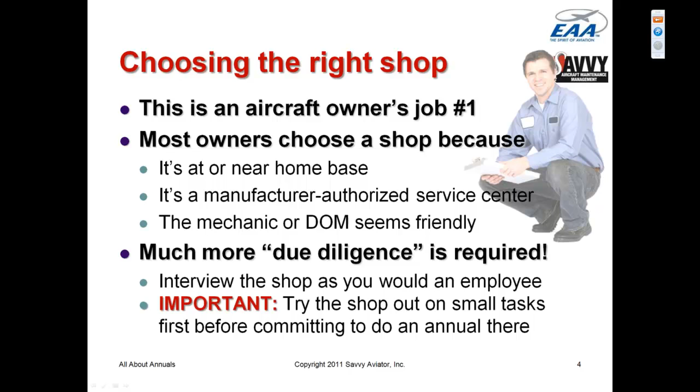To net down what we look for when we're evaluating a shop, I call it the 3 C's. We're looking for competence, good communications, and cooperation.

Competence means that the shop has extensive experience with your particular make and model. Just because a shop is very good with, say, Cirruses, we would not take a Cessna P210 there for an annual. We need a shop that has extensive experience with your particular make and model, or what we like to call high time and type on the part of the mechanics.

Communication is absolutely critical. You cannot manage an annual unless the shop is willing to keep you in the information loop and allow you to make decisions wherever decisions are required.

Many shops are very good at communications, others are very bad. Shops that take the attitude of 'you hired us to do the annual, now go away and let us do our job' are simply not shops that we can deal with, because decision making needs to be done by the owner, not by the mechanic. If the mechanics don't keep the owner in the information loop, then the owner can't do his job of making maintenance decisions.

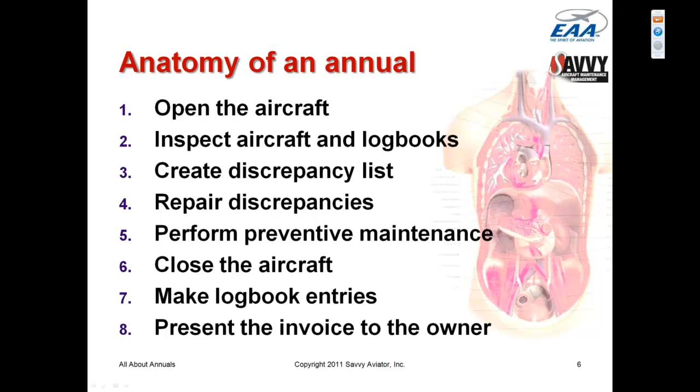There's a very important point in that sequence, what I call a decision point, which occurs after the inspection part of the inspection is completed and the discrepancy list has been prepared, but before any discrepancies are repaired. That's the point where if the aircraft owner is going to affect the outcome, that's where he has to do it.

It's the owner's job to review the discrepancy list and then go back and get any questions answered that he needs answered, and frequently there'll be a lot of questions at this point. Then when he fully understands the situation, go back to the shop and say, here's what I want you to do, here's what I want you not to do. This is the decision point. If the owner isn't heavily involved in the inspection right at this decision point, then he's not going to be able to affect the outcome, and he's basically going to be a bystander, which is not what we want.

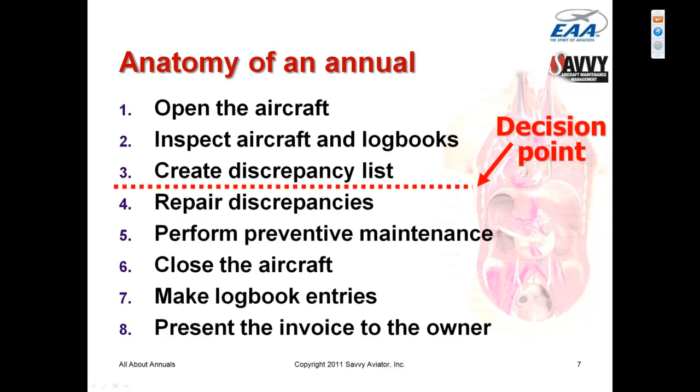So in order to make sure that the owner is involved at the decision point, we divide the annual into 3 phases. The first phase is the inspection phase, which the service center normally does at an agreed-to flat rate, as opposed to doing it on time and materials. Almost every shop will agree to do the inspection part of an annual inspection for an agreed-to flat rate, so there won't be any surprises as to what the inspection part costs. The inspection culminates with the preparation of a work order that contains a detailed discrepancy list and specific repair recommendations with specific cost estimates for each one.

The second phase is the review and approval phase. At this point, the responsibility transitions from the shop to the aircraft owner, and the owner reviews the discrepancy list and cost-to-repair estimates in detail, asks whatever questions he needs to ask, consults whatever outside experts he feels like consulting, and ultimately winds up giving the service center specific direction as to which items he wants repaired and which items he doesn't want repaired.

And then finally, in phase 3, responsibility passes back from the owner to the shop, and the shop performs the repairs as the aircraft owner has directed, and ultimately submits an invoice and prepares logbook entries approving the aircraft for return to service. So this 3-phase protocol is the way we ensure that the aircraft owner is involved at the decision point and gets to make the decisions that he needs to make.

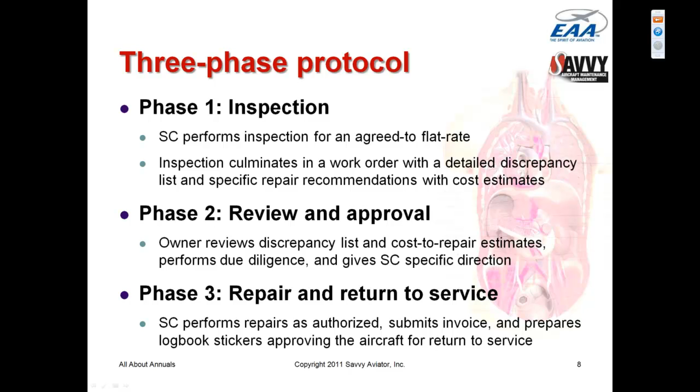Here are some examples of work orders, and various shops have work orders that look different because they use different software. Occasionally we will still see these work orders prepared by hand, but nowadays most shops of any decent size have a good computerized work order management system, and wind up presenting work orders that are nice and easy to read and formatted.

Here's an example of one. The things I've boxed with little red boxes are the indications for each item. First of all, notice that each item is numbered so that we can refer to these items by number easily when we go back to the shop and say what we want to approve and what we want to decline. Second, each of the items is identified as to whether it's an airworthiness item, a recommended item, or a preventive maintenance item. In this case, item 13 is marked customer declined because the customer already said he didn't want to clean the fuel injectors, for good reason.

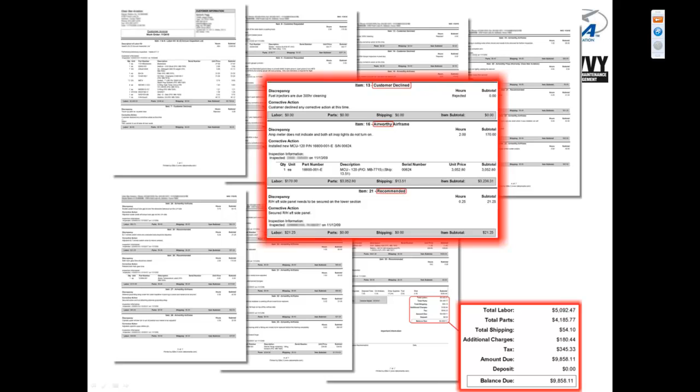Here's another segment of a work order, again showing how the various items are clearly identified, or should be clearly identified, as whether they're airworthiness items that the shop feels must be addressed, or whether they're recommended items that are at the discretion of the owner.

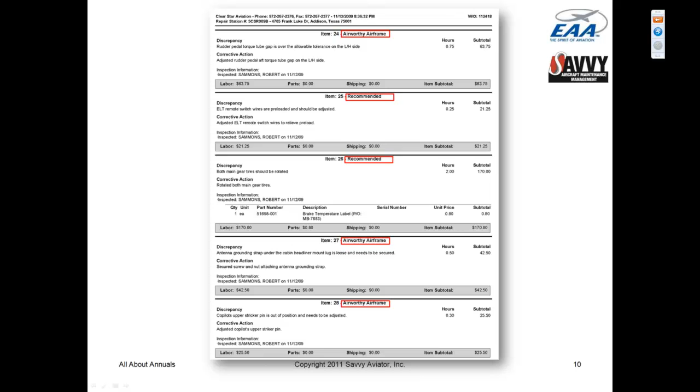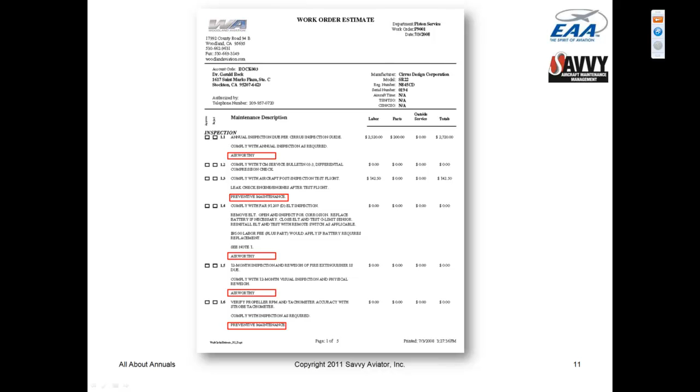Here's another one that uses a different software package, but again, each item is numbered and each item is clearly identified as whether it's an airworthiness item or not.

At the conclusion of the owner's review and due diligence, the owner would then come back to the shop with specific direction as to what items he approves, what repairs he approves to have done, and what items he declines.

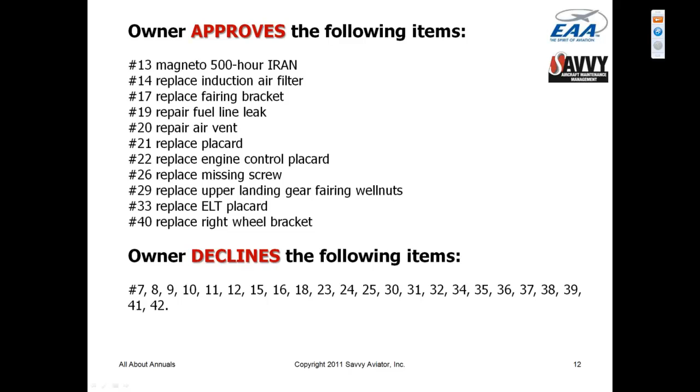Here's another example where the shop presented its discrepancy list as an Excel spreadsheet, and after consulting with the owner, we annotated the spreadsheet to indicate which items are declined and which are approved, and sent the annotated spreadsheet back to the shop.

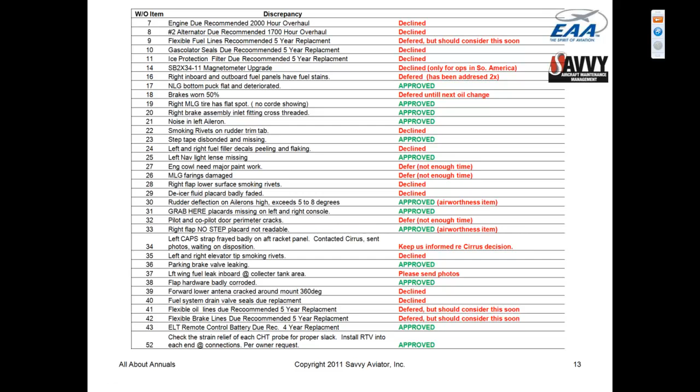Again, here's an example of a list of manufacturer recommended time-directed items that the shop presented us, and again, in consultation with the owner, we went through and crossed off the ones that we didn't want done, and sent the annotated list back to the shop.

So there are various ways of doing this, but basically the idea is the shop provides recommendations, the owner goes over those recommendations and decides which ones to accept and which ones to decline.

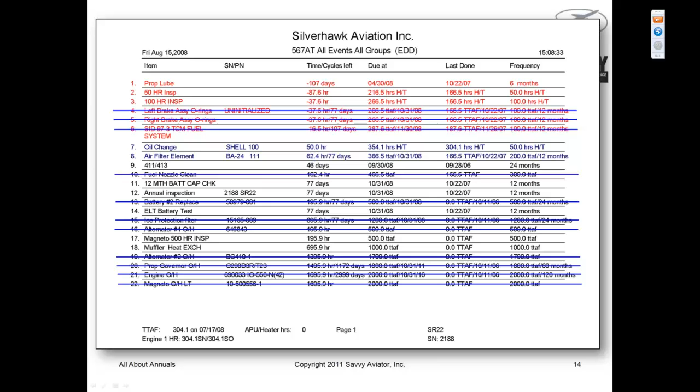One of the things we often run into at shops that is totally unacceptable, where we have to work kind of hard to get them to follow reasonable protocols, is where instead of completing the inspection first and providing a discrepancy list and waiting for the owner to give approvals or disapprovals, the shop will fix things as it goes along. It will inspect a little and fix a little, and so on.

That's very convenient for the shop, but it is a total disaster for the aircraft owner, because by not segregating the inspection from the repair phase, the shop basically prevents there ever from being a decision point where the owner can go in, review the inspection findings, and make decisions as to what he wants done and what he doesn't want done.

And so by doing this inspect-a-little, fix-a-little thing, which is something that we find quite commonly in shops that we haven't had a chance to train, if you will, the owner is precluded from carrying out his part of the responsibility, and the decisions wind up being made by the shop rather than the owner.

And when decisions are made by mechanics rather than owners, those decisions frequently will not be what the owner would want to do or what's in the owner's best interest.

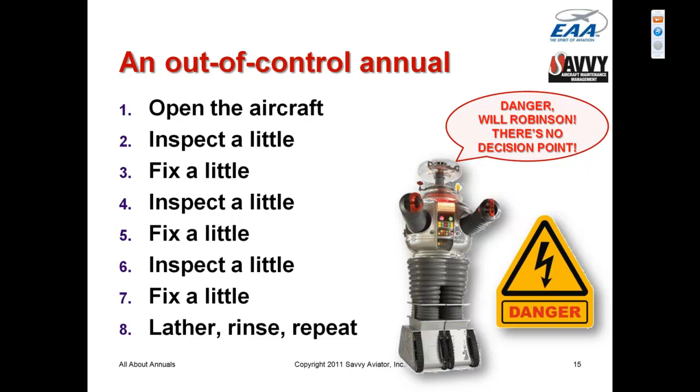Let me give you a couple of examples of situations that we run into. This was one that I happened to find on the Cirrus Owners and Pilots Association forums a couple of years ago, where a Cirrus owner just got the invoice back on the first annual on his airplane since it was out of warranty.

During the first couple of years, the airplane was under warranty, and Cirrus wound up paying for everything. Then, of course, there's that come-to-Jesus moment where the airplane goes out of warranty, and all of a sudden the invoice winds up going to the aircraft owner. The owner posted the invoice to the COPA forum and was decrying the fact that it was a $12,000 annual, and he was very, very upset that it was so expensive.

I started to go through this invoice that he posted, and I found it kind of interesting. Let's just walk through it very quickly.

The first item on the invoice, as always, was a flat rate annual inspection. The shop charged a little less than $2,000 for the annual, which is right on target. At that time, a normally aspirated Cirrus SR22 annual flat rate was 23 hours, and that's exactly what they charged him at a shop rate of $84 an hour, which was quite reasonable for the location where the shop was based.

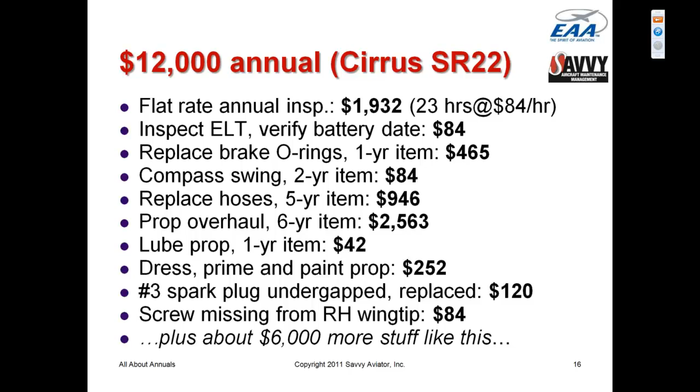Maintenance, and particularly annual inspections, need to be managed actively. You can't just hand the keys to the shop and say, call me when you're done and I'll pay your invoice. You've got to be more involved than that. Otherwise, you're not going to be happy with the outcome.

We'll go through another example very quickly, or as quickly as I can. This one was very interesting. It was probably the furthest over the top annual I've ever seen on a Cirrus aircraft.

This owner has a 2003 SR-22 that he flew a lot, 250 to 300 hours a year. He basically commuted to work in it, and since the warranty had expired, he'd been having the annuals done at a particular Cirrus service center, typically getting invoices in the $5,000 to $6,000 range. And for reasons that I don't totally understand, in 2010 he decided to use a different Cirrus service center, one that he'd never used before and one that he had clearly not done any due diligence on.

This particular service center was one that there had been so many complaints about that literally the week he put his airplane in the shop, Cirrus revoked the service center's Cirrus authorization. But the owner didn't really do any due diligence. He just put this airplane in the shop and then decided to go off on a business trip to India.

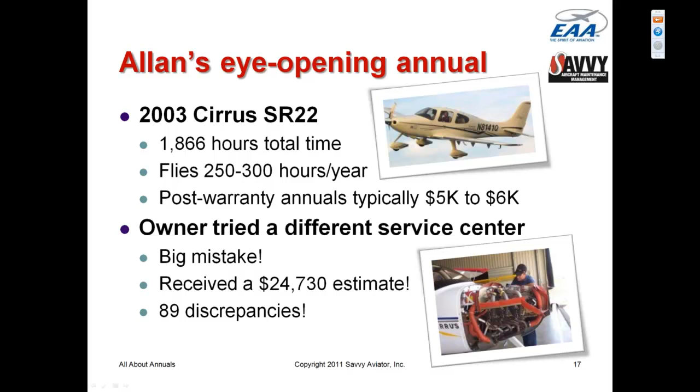A couple of weeks later, he's in Mumbai, and he gets an email from the shop containing the discrepancy list and estimate. It included 89 discrepancies and nearly a $25,000 bottom line. Obviously, the owner was quite aghast when he received this, and he emailed me and said, 'Can you help?' which is when I got involved in it.

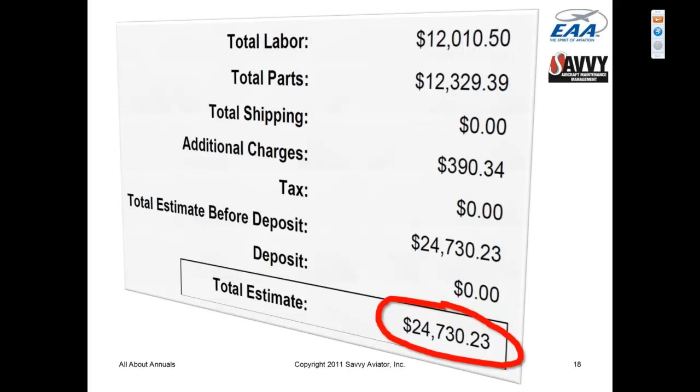But $25,000 for an annual inspection on a Cirrus is way out of the envelope, obviously. So he emailed us the work order. We started going through it, and here's a quick summary of what we found on this work order.

There was an inspection flat rate of $3,600, which is, as you now know, about 150% of what it should have been. $2,400 might have been reasonable, but certainly not $3,600. But he'd already agreed to this, and the inspection part had already been done, so he was stuck with paying the $3,600.

Now we got into all of the discrepancies and repair recommendations on the work order. As you can see, there's a whole slew of 5-year recommended items: flex hose replacement for $1,900, fuel drain valve seals for $180, gascolator seals $150, aileron rudder shock cord $160, a 500-hour recommended alternator number 1 replacement for $1,440, a 1,700-hour alternator 2 overhaul for $790. All of these are items that we would decline.

And also notice that they were all way at the top of the range. For example, on the previous Cirrus SR22 we looked at, the 5-year flex hose replacement was quoted at $900 and some odd dollars, and on this one it was quoted at $1,900. So they must have been proposing to use gold-plated hoses or something.

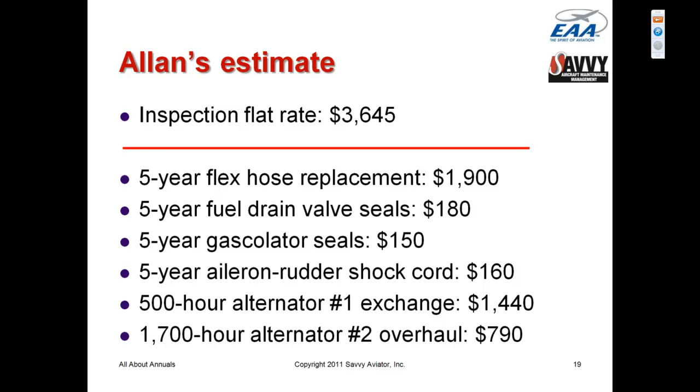The 6-year propeller overhaul for $3,720. A 4-year overhaul of magnetos for $1,700, 2-year main battery replacement $700, 2-year TKS anti-ice filter replacement $320, annual fuel injector nozzle cleaning $200.

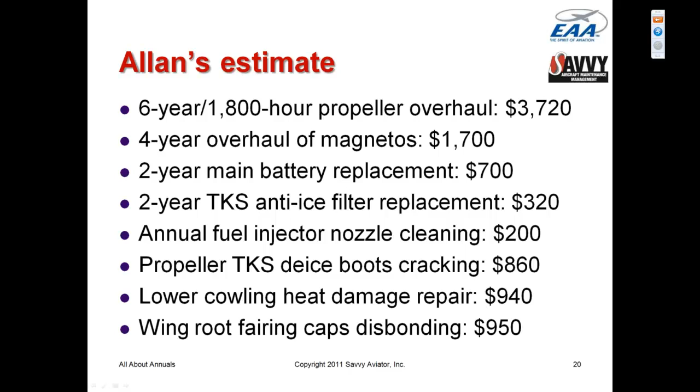The shop indicated that the TKS de-ice boots on the propeller were starting to crack, and they proposed to replace them for $860. That the lower cowling had heat damage, and they proposed to repair it for $940. Wing root fairing caps were disbonding; they proposed to replace those for $950. Muffler flame cones were warped, and they proposed to replace the mufflers with new ones.

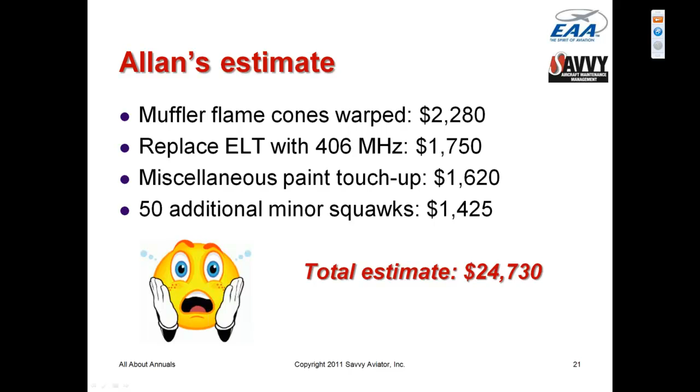At $2,280, to replace the current 121.5 ELT with a 406 megahertz unit for $1,750. Miscellaneous cosmetic and paint touch-up for $1,620, and about 50 additional minor squawks for about $1,425, for a grand total of nearly $25,000. Now notice, all of those items stacked up in one stack, that all of the items that I've circled in red are ones that there's nothing wrong with.

They're not actually discrepancies. They're simply timed recommended items that the manufacturer is recommending doing replacement or overhaul or something at a particular time, but there's nothing wrong. The inspection didn't find that the flex hoses were bad, or the drain valve seals were leaking, or the aileron rudder shock cord was damaged. These are all items that didn't have any inspection finding of an airworthiness issue, but were simply timed manufacturer recommendations.

Only the items that were not circled here, like the de-ice boots cracking and the heat damage on the cowling and so on, were actual inspection findings where there was something found to be awry.

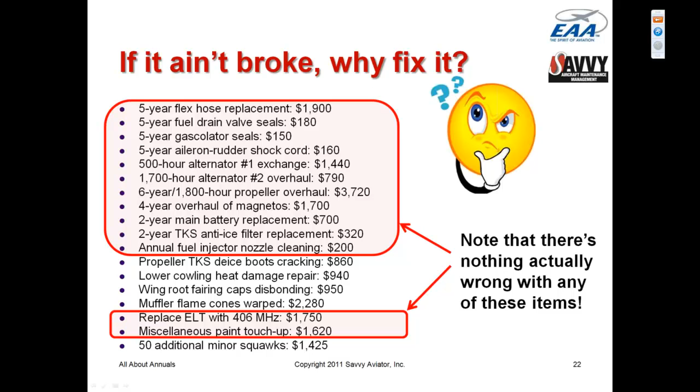So what do we recommend the owner do? We recommend that the owner say no to most of those items that were boxed, where there wasn't actually anything found wrong.

Let me go into a little bit about our thinking on this before we go into the specifics of how we resolve this issue for the owner. We're strong believers in the philosophy called reliability-centered maintenance, which I've done webinars on, which is the philosophy that the air transport industry, the airlines, have used since the 70s, that the military has used since the 80s, and frankly nowadays the only part of aviation that doesn't use this approach is owner-flown GA, low-end GA, like where we are.

One of the goals of my writing, my management company, the classes I teach, and the webinars I give is to try to drag general aviation maintenance kicking and screaming into the 21st century, where we use the same fundamental maintenance approaches that the big boys have used for decades. But one of the fundamental philosophies of reliability-centered maintenance is that maintenance is not inherently a good thing.

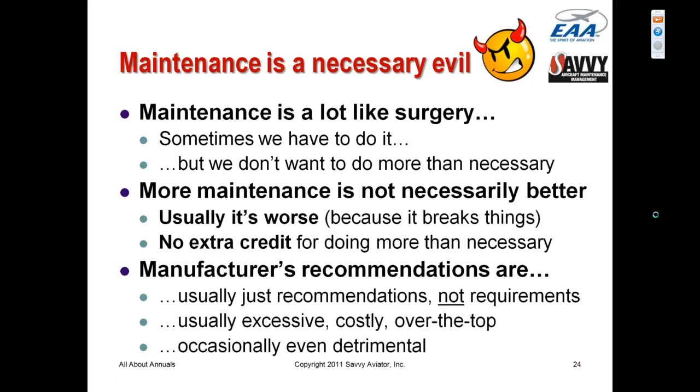It's important to understand that mechanics are going to maintain the airplane strictly by the book, strictly by the manufacturer's recommendations, unless you instruct them not to. The reason is that if a mechanic does not maintain the aircraft in accordance with manufacturer recommendations, makes a decision not to do something by the book, and then something bad happens, he's going to be in a very difficult position when you turn around and sue him. Every mechanic is terrified of being sued these days.

There's been a total explosion in litigation against mechanics and shops since 1994, which is when Congress passed the General Aviation Revitalization Act of 1994. So every mechanic these days will do everything exactly the way the manufacturer recommends, unless the owner instructs him not to, and instructs him not to in writing.

If you tell the mechanic, no, I don't want you to do this list of items, then your instructions to him are his get-out-of-jail-free card if anything bad happens. But if you don't instruct him to decline an item, he's always going to do everything the manufacturer recommends, because to not do that will open him up to liability exposure.

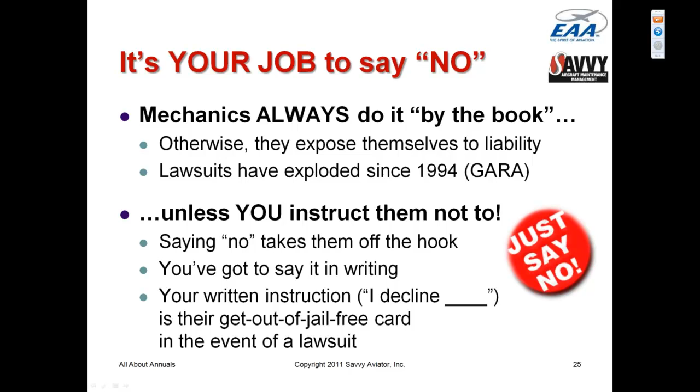That's why it's really important for owners to be actively involved in the decision-making process. If an owner is not involved, the mechanics will typically make decisions to minimize their liability, and minimizing the mechanic's liability is not generally coincident with the owner's best interests. Of course, the trick is knowing when to say no and what to say no to.

Let's talk about that a little bit. High on the list of things to say no to are time-scheduled recommendations that can be performed on condition instead of on a time basis. In other words, instead of doing something every 2 years or 5 years or so many hundred hours, do it when an inspection indicates that the part is deteriorating and needs to be replaced.

The latter is called on-condition, the former is called on-time. Condition-based maintenance is always far more cost-efficient than time-directed maintenance, because condition-based maintenance calls for performing maintenance when it's demonstrably necessary, whereas time-based maintenance calls for doing maintenance based on somebody's guess as to when it might be necessary, and those guesses are always hugely pessimistic because they have to work for the worst-case airplane in the fleet. So they're very likely wildly excessive for the average airplane in the fleet.

Consider ignoring manufacturers' time-based recommendations and replacing or repairing only when inspection shows that replacing or repairing is necessary. Engine and propeller TBOs are excellent candidates for this approach.

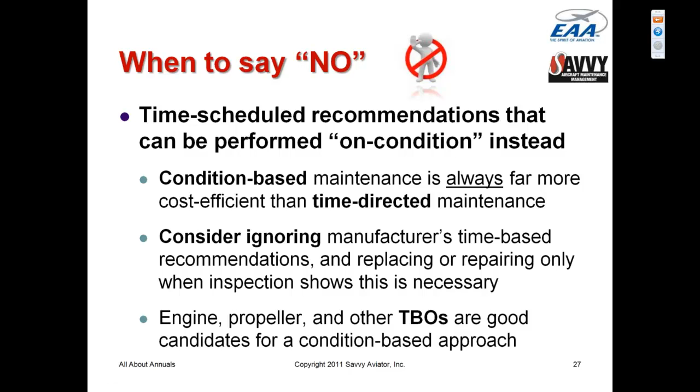Another thing that's a good candidate to say no to is preventive maintenance intended to prevent acceptable failures. What's an acceptable failure? It's a failure that, if it happens, is not going to cause you to fall out of the sky and is not going to cause you to get stuck somewhere that you don't want to be.

A perfect example is the periodic replacement of the TKS anti-ice filter on the Cirrus. That's a $300 or $400 maintenance item that they recommend doing every 2 years. That's, in my view, totally insane. We have never taken out a TKS filter that wasn't absolutely spotless. Why? Because the only thing that ever passes through that filter is pure TKS fluid.

Basically what I say to the Cirrus owners I consult with is, unless you have some reason to believe somebody accidentally dumped a Diet Coke in your TKS tank, there's no reason in the world to ever replace that filter unless the TKS system is starting to act up, in which case it might be worth looking at the filter. But to do this $500 maintenance item every 2 years, that's a $250 a year maintenance item that isn't going to accomplish anything whatsoever. It's just a classical case of the kind of thing we say no to.

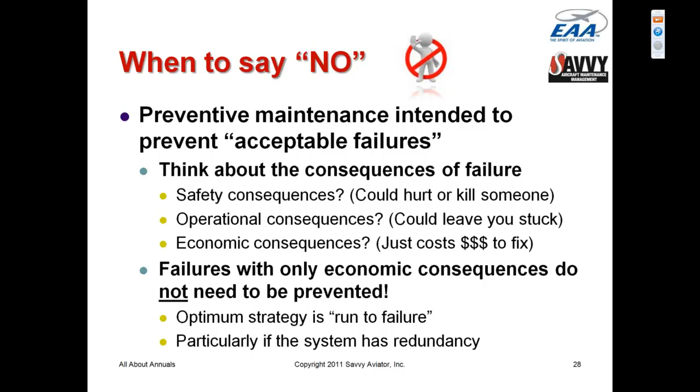Finally, let's not overkill problems. We don't want to replace something if we can overhaul it. We don't want to overhaul it if we can repair it. And we need to be very careful about these words, because words like repair, or IRAN, which is an acronym for inspect and repair as necessary, overhaul, and rebuild, all have very specific regulatory meanings. We want to always use the right word.

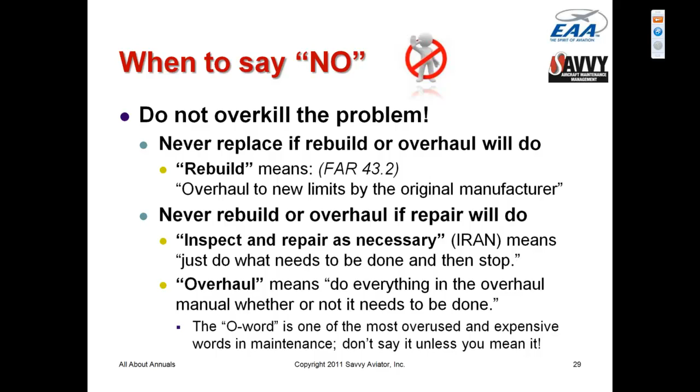There's pretty much a hierarchy of words here. The one at the bottom is the least expensive, and the one at the top is the most expensive. Anytime we have an unairworthy component, we want to decide which of those 4 things to ask for, and typically you want to ask for the lowest cost one that will get the job done.

When we have a 500-hour magneto inspection, we never ask for the mag to be overhauled or rebuilt at 500 hours. We always ask for an IRAN—inspect and repair as necessary. That gives the magneto technician the maximum amount of flexibility to simply replace those parts that he feels need replacing, and to use his own judgment. If we tell him to overhaul the mag, we basically take away his ability to use any discretion. He has to open the overhaul manual and replace everything that manual calls to be replaced, irrespective of whether the part needs to be replaced or not from a functional standpoint.

So many owners and many mechanics are spring-loaded to the overhaul position. The O word is one of the most expensive words in aviation maintenance and should be used very judiciously. We always ask for a repair or an IRAN unless it's clear that an overhaul is needed. Rebuilt is more expensive—rebuilt means overhaul to new limits by the original manufacturer. So, for example, anyone can overhaul your Continental engine, but only Continental can rebuild your Continental engine.

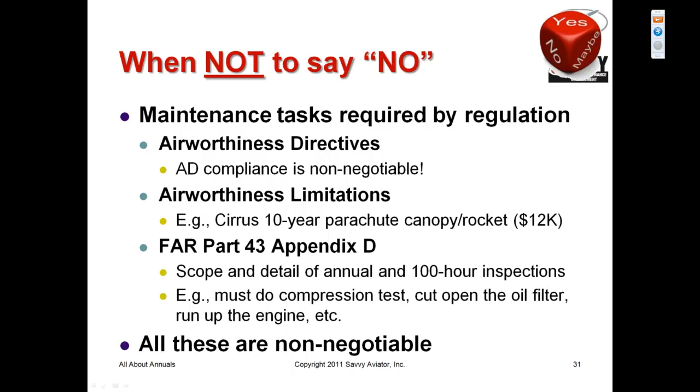And then there are items, discrepancies, that the inspecting IA considers to be an airworthiness item and marks as an airworthiness item on the discrepancy list, as we saw before. An airworthiness item is one that the inspecting IA judges to be not in conformance with the aircraft type design or not in condition for safe operation.

By identifying that discrepancy as an airworthiness item, the IA is basically telling you, I'm not going to be able to sign off the annual unless we fix this. In general, we say yes to repairing airworthiness items because if we say no, we're going to get into an argument with the IA.

On the other hand, some IAs are ultra cautious and call almost everything an airworthiness item. So if an IA calls something an airworthiness item and you disagree, go get a second opinion. And if the second opinion giver tells you that he doesn't think that really is an airworthiness item, then push back. And in the worst case condition, if you are deadlocked with the IA, and we'll talk about this a little bit later, you can...

Break the deadlock by directing the IA to have an annual signed off with discrepancies. We'll talk about that on a subsequent slide.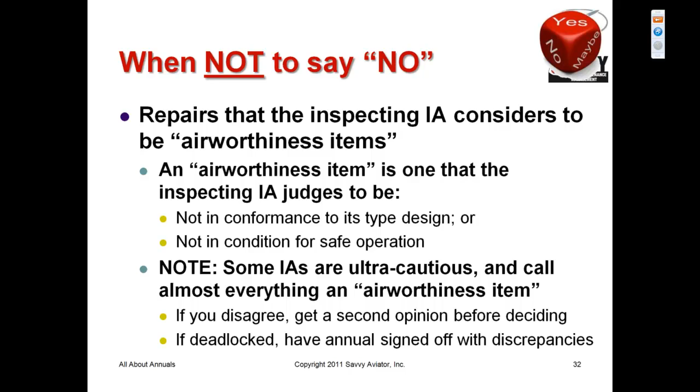At any rate, getting back to our friend Allan with the $25,000 annual estimate, we wound up going through it and declining a bunch of stuff and coming up with a final total of $8,000. Still a lot of money for a Cirrus annual, and there were some things we couldn't do anything about because the owner picked a very difficult shop to work with. But we did reduce the invoice total by about $17,000.

Just quickly, the 5-year flex hose replacement, we declined and recommended that the owner, because the airplane was very active and was hangared, leave the hoses in place to 7 to 10 years, then replace them with Teflon hoses that don't have a 5-year hose replacement recommendation and would probably last for as long as the owner is going to own the airplane. The 5-year fuel drain valve seals, replacing those are silly.

You replace those if the fuel drain is dripping. If the fuel drain isn't dripping, you leave it alone. The same thing with the gascolator seals. If they aren't dripping, leave it alone. Aileron rudder shock cord, if they look okay on inspection, leave them alone. When they don't look okay on inspection, that's when you change them.

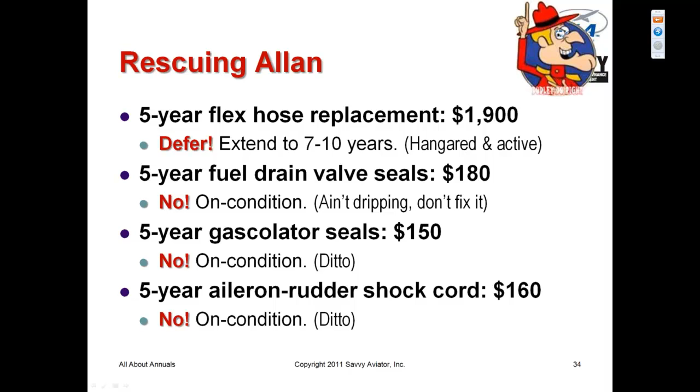500-hour alternator number 1 exchange, no. This is a dual electrical system, dual alternator airplane. It's got 2 batteries, 2 alternators, dual buses, specifically so that the failure of an alternator is not a safety-of-flight item. You fail one alternator, you've got another one. So in a case like that, alternator failure is an acceptable failure, so we run the alternators to failure. We said no, we're not going to change them on time. We're going to run them to failure.

The propeller overhaul we've already discussed. There's no need to overhaul that propeller at 6 years. And even when the prop gets to an age where it would be prudent to take it apart, we will recommend an IRAN rather than an overhaul, which will cost about one-third as much as an overhaul.

4-year overhaul of magnetos is totally silly. There's nothing in a magneto that requires replacement on a calendar time basis. We always recommend, as does the mag manufacturer, doing a mag teardown at 500 hours, but we don't do an overhaul. We do an IRAN, and typically the cost will be maybe $400 or $500 per magneto, about half of what the cost of doing the overhaul would be.

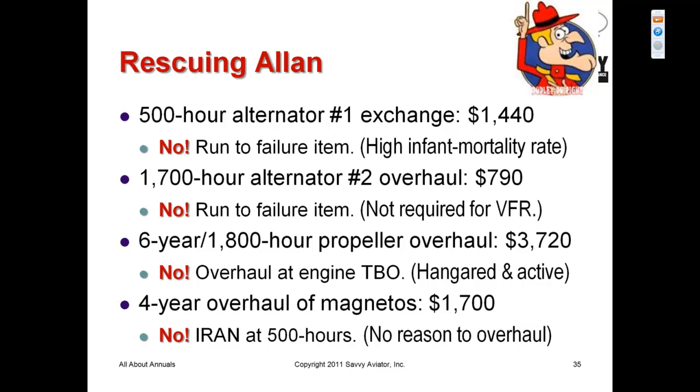2-year main battery replacement, no. Batteries should be replaced on condition via capacity check. That's what the battery manufacturers recommend. Doing it every 2 years is silly. These batteries normally last 3 to 5 years, sometimes 6 years. We replace them on condition by doing a capacity check. Don't do it on a time basis.

TKS anti-ice filter, as I indicated, is silly. We never replace those. They're always spotless.

Fuel injector nozzle cleaning, again, we talked about. We always say no to that. If a nozzle is clogged, it's very clearly visible in engine monitor data. If the engine monitor data shows a small GAMI spread, then we know the nozzles are fine, and removing them for cleaning is just silly. So we always say no to that.

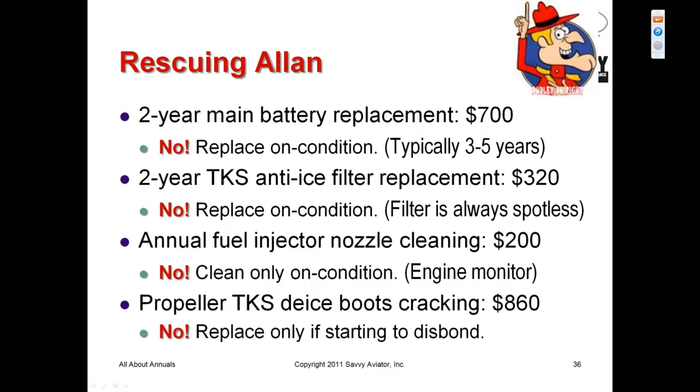The prop TKS de-ice boots cracking, we asked the shop to take photos of them. We looked carefully at the photos. The cracking was only cosmetic. It hadn't reached the point where the de-ice boots were at risk of starting to debond from the propeller. They will eventually have to be replaced, but certainly not at this early stage.

The lower cowling heat damage, we also asked for pictures. We looked at it. It looked pretty bad. We authorized the repair. Wing root fairing caps disbonding, the same thing.

Cirrus, in its infinite wisdom, adhered these things to the aircraft with double-sided tape. The tape eventually starts losing its grip, and we want to replace them before we wind up losing them in flight, so we authorized that.

The muffler flame cones were warped. Instead of approving a replacement of the mufflers for $2,280, we had the mufflers sent out for repair by AWI up in Minneapolis, which is the same company that manufactures them, and the repairs are about half the cost of a new muffler. So we did have this done, but we did it via repair rather than replace, and saved the owner over $1,000 just doing that.

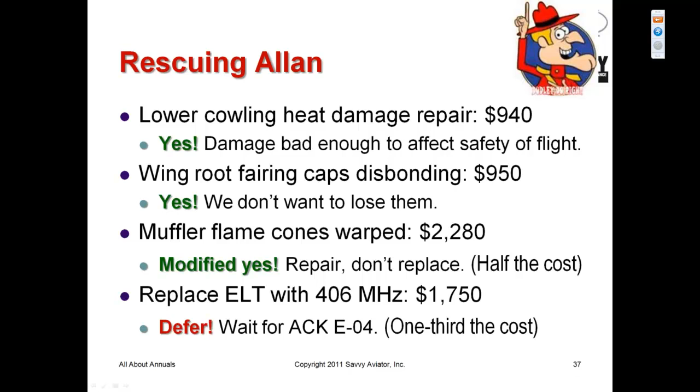The ELT replacement, obviously not yet required by regulation. The owner had an ACK E01, and we recommended that he wait another year until the ACK E04 was available, which was a drop-in replacement for the E01 that would cost him one-third as much as the ELT that the shop was proposing, and that's what he did. So we saved him another $1,000 doing that.

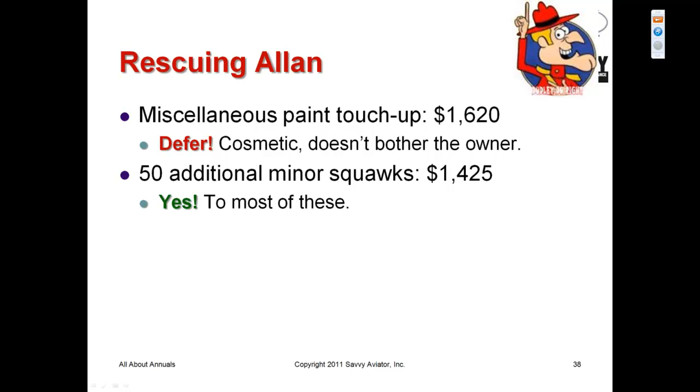The miscellaneous paint touch-up, we asked the owner if the cosmetics bothered him. He said it doesn't bother him a bit, so we declined. And most of the 50 other little squawks we approved. So the bottom line was the total came down from $25,000 to $8,000 by declining those items that seemed like they should be declined. Gives you a pretty good idea of how we manage these annuals.

Again, the shop was prepared to do everything that the manufacturer recommends. That's what most shops will do, absent input from the aircraft owner. So if you don't want to be doing all those things and paying all that money for stuff that really doesn't accomplish anything useful, you have to be the one to say no, and typically say no in writing, which takes the shop off the hook for the decision and puts the decision in the hands of the aircraft owner where it really belongs.

Okay, at the end of every annual, there is a logbook entry. And there are two different kinds of logbook entries that can occur at the end of an annual. Either the aircraft is found airworthy or it's not.

98% of the time, it's found airworthy, and the logbook entry contains language that comes right out of the regulation, FAR 43.11, with an approval for return to service. It should contain the following sentence: I certify that this aircraft has been inspected in accordance with an annual inspection and was determined to be in airworthy condition. When you get that logbook entry, the airplane has been approved for return to service and you can go fly it.

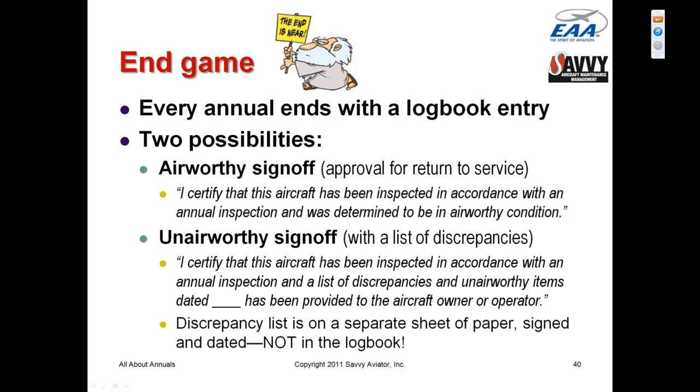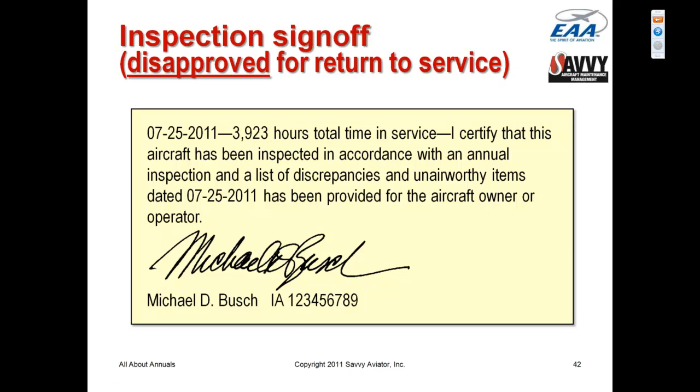Now, sign-offs with discrepancies are something that is not very well understood by most aircraft owners because they typically haven't ever experienced it. But it's important to understand how it works.

If you have an annual signed off with discrepancies, which typically happens when you direct the shop to sign it off with discrepancies because they're trying to get you to do something you don't want to do, if you get the aircraft back with that second kind of logbook entry, disapproved for return to service, the inspector has to give you a signed and dated list of discrepancies on a separate piece of paper. The annual inspection is now complete. The airplane does not have to be inspected again for another 12 calendar months.

The aircraft may not be flown because it has discrepancies, but those discrepancies can be corrected by any authorized person, typically any A&P mechanic. In some cases, certain discrepancies are ones that you could correct yourself under your preventive maintenance authority. After the discrepancies are corrected, there is no need to take the airplane back to the shop that did the annual, no need to ask the IA to inspect the work.

The minute the IA signs off the disapproval logbook entry, his job is done. He goes home. You get the airplane back. It's your responsibility to get somebody to correct the discrepancies, and it never has to go back to that IA again.

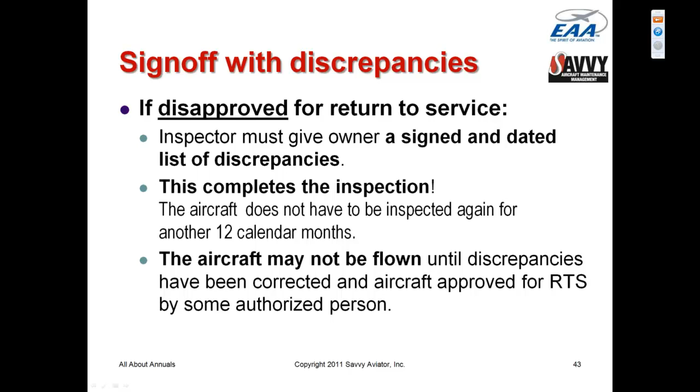Here's an example of a case where the owner of a Cessna 340 had an annual inspection done by Cutter Aviation in Albuquerque, and decided that he wanted to have a bunch of the discrepancies that were found during that annual resolved by another shop in Alamosa, Colorado, which I believe was his home base.

So the Cutter shop who did the inspection signed off the annual with discrepancies. The wording that they used was not exactly correct - it wasn't exactly the wording that the reg called for, but it was close enough. It basically says a list of discrepancies and unairworthy items has been provided to the aircraft owner. And then down at the bottom, they say that they've inspected the aircraft and found it safe for a one-time special flight permit, which is a ferry permit, to fly the airplane, admittedly unairworthy, from Albuquerque to Alamosa to have the work done at the shop in Alamosa.

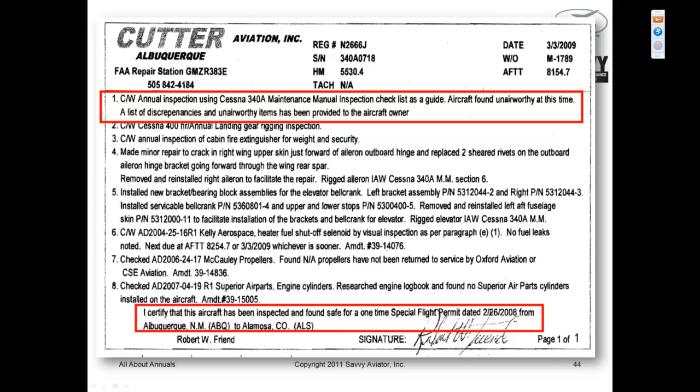And then the next logbook entry is the one from the shop in Alamosa, Mountain View Aeromotive, that says it repaired the items from the Cutter work order, a whole bunch of detail, and signed off. So that logbook entry clears the discrepancies that were itemized by the first shop that did the annual. That's an example of an annual signed off with discrepancies, and then those discrepancies being corrected by somebody else, in this case at a different airport via ferry permit.

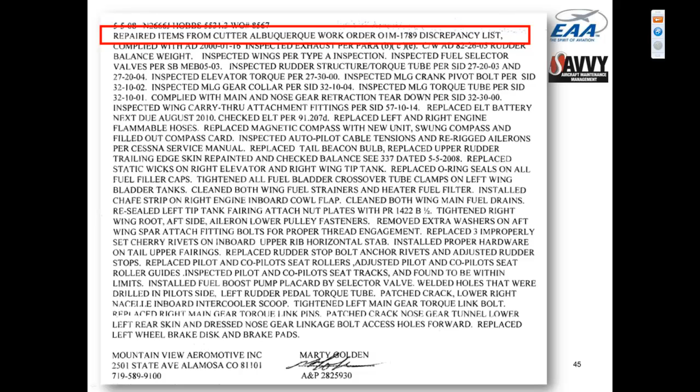Very important to understand that when you get your airplane back from any maintenance, particularly an annual inspection, but this is true of any maintenance, you may not fly that airplane until it has been approved for return to service and the required maintenance record entry has been made and signed by an authorized person.

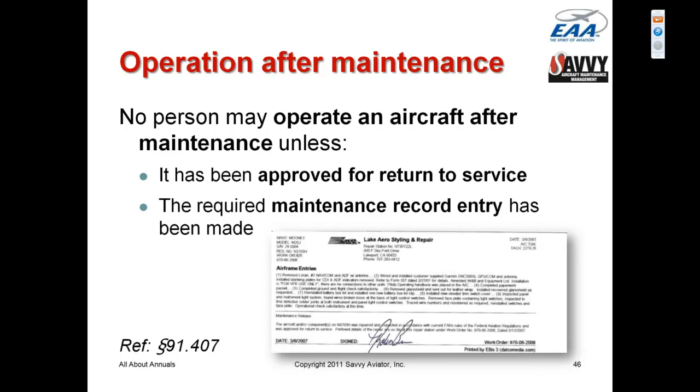We see this happen constantly, and it's very bad: never accept an IOU for a logbook entry. If you go to the shop to pick up your airplane and they say it's ready but we haven't prepared the logbook entry yet, we'll do that on Monday - legally, you cannot fly the airplane until that logbook entry has been made and signed. You are required by regulation to personally verify that the logbook entry has been made and signed before you fly.

Ironically, if you fly the airplane before the work has been signed off, the shop is not in trouble. The shop could take six months to make that logbook entry and they would not have violated any regulation. But if you fly the airplane before that maintenance record is made and signed, and that you've verified it, then you're in violation. So never accept an IOU for a logbook entry - you can't fly the airplane until the logbook entry has been made and signed.

FAR 43.13, performance rules for mechanics, says each person performing maintenance shall use methods, techniques, and practices prescribed by the manufacturer or acceptable to the administrator, and tools, equipment, and test apparatus recommended by the manufacturer or in accordance with accepted industry practices.

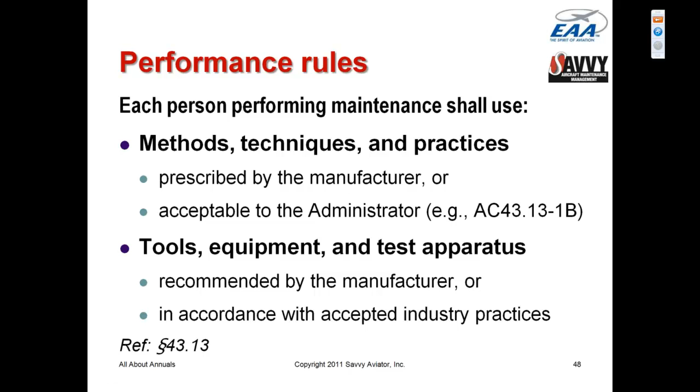So maintenance has to be done either using methods, techniques, and practices prescribed by the manufacturer, or methods, techniques, and practices acceptable to the administrator. What kinds of methods, techniques, and practices are acceptable to the administrator? Well, the administrator has published many advisory circulars providing acceptable methods, techniques, and practices - notably one called AC 43.13-1B, which is about the size of a good-sized telephone directory, just chock full of acceptable methods, techniques, and practices.

So we can do things the way the manufacturer specifies, or the way the FAA specifies in this big fat advisory circular or any other advisory circular.

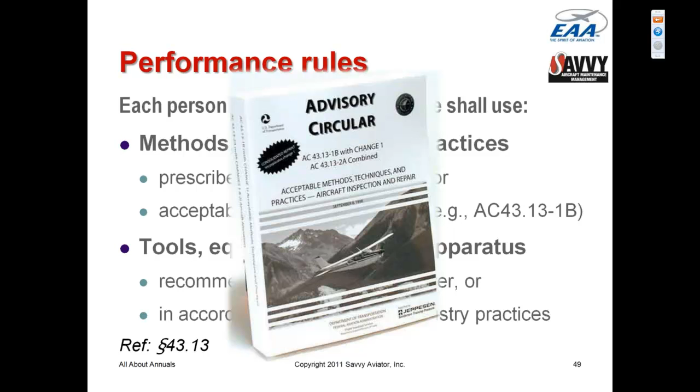Now, it's important to understand that the phrase methods, techniques, and practices as it appears in these regulations means how to do something, not when to do something. How-tos are the responsibility of the mechanic - it's his responsibility to perform things in accordance with acceptable methods, techniques, and practices. When to do something is not the mechanic's responsibility, it's the owner's responsibility. There is not a syllable in Part 43 about when-to's. All of the discussion about when to do things is in Part 91, directed to the aircraft owner.

When-to's prescribed by the manufacturer need not be complied with unless explicitly mandated by the FAA, either in an airworthiness directive or in an airworthiness limitation section for relatively newly certified airplanes that have airworthiness limitation sections. Otherwise...

Manufacturers' when-to's - TBOs, life limits, inspection intervals, et cetera - can be totally ignored. They have no regulatory significance, and it doesn't matter what words the manufacturer uses. The manufacturer can say mandatory or compulsory or you must - it doesn't matter what adjectives he uses. We never, ever have to comply with manufacturer-specified intervals unless the FAA requires us to do so via an airworthiness directive or an airworthiness limitation.

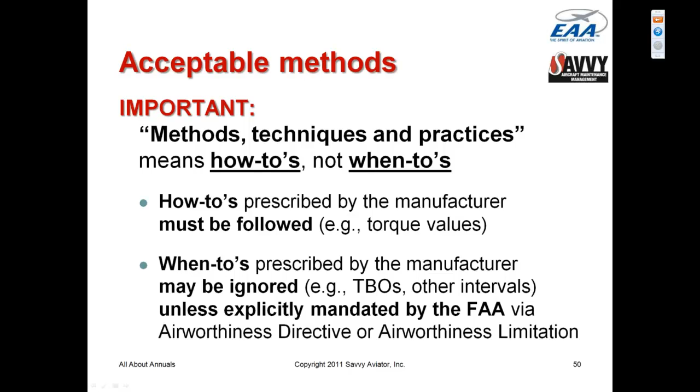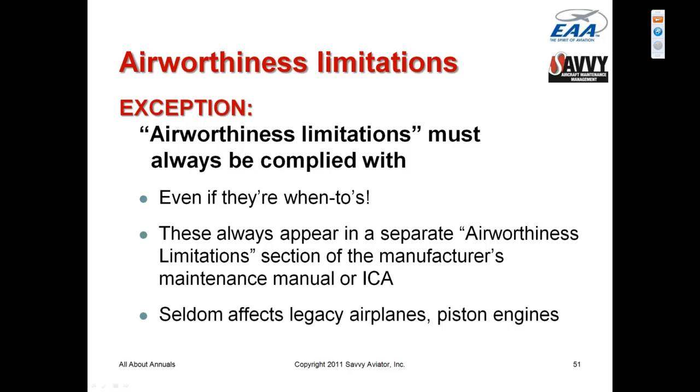Airworthiness limitations are an exception - they always must be complied with, but you will never find an airworthiness limitation section on a legacy aircraft, or any Lycoming or Continental engine, or most propellers, which are not affected by airworthiness limitations. So just because the manufacturer says you have to do something every 500 hours, or overhaul a prop every six years, doesn't mean you have to do it. Those are merely manufacturer recommendations with no regulatory impact, and it's totally up to the owner whether to do it or not.

Inspection rules - this is FAR 43.15, again directed to IAs. Each person performing an inspection shall determine whether the aircraft meets all applicable airworthiness requirements. What are all applicable airworthiness requirements? They are airworthiness directives, but not service bulletins - we never have to comply with manufacturer service bulletins unless there's an AD that says we do.

Airworthiness limitations, but not manufacturer's recommendations that appear outside of an airworthiness limitation section. So the vast majority of manufacturers' recommendations are purely recommendations and not requirements.

Compliance with type design and the IA's opinion of what is in condition for safe operation. The first three bullets are all theoretically objective. The last bullet is subjective. The IA, you're paying the IA to make a subjective determination of whether the aircraft, in his opinion, is in condition for safe operation.

An IA is required to use an inspection checklist, but it can be any checklist he wishes to use. It doesn't have to be the manufacturer's checklist. It can be one that he derives from any source, or one that he makes up himself.

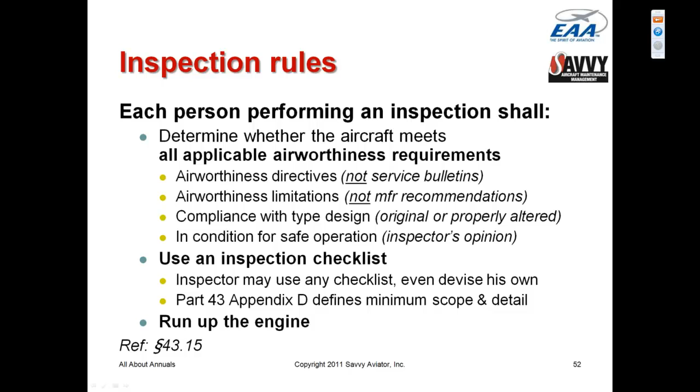And finally, the last thing we'll talk about very briefly is resolving disputes. Disputes with a mechanic while your airplane's in annual can be very, very painful and awkward. It's not a good thing to have happen. That's why we don't like to do annuals with shops we've never worked with before, because we don't want any surprises. But occasionally disputes will come up during annual inspections.

If that happens, there's basically a three-step routine that you should go through to get those disputes resolved. The first thing you should do is attempt to compromise with the IA.

Sit down with him, preferably in person if you can. Explain your position and why you disagree with him, and indicate that you've done your homework and consulted with outside experts or whatever before taking the position you're taking.

Then give the mechanic the opportunity to explain his position carefully and to explain to you his reason for taking the position he's taking. It may be that he has good reasons, and it may be you'll learn something.

Try to find some common middle ground that you can compromise on. If you do this with a cool head and a professional manner, most of the time you'll be able to come to an agreement with the IA and resolve the dispute that way.